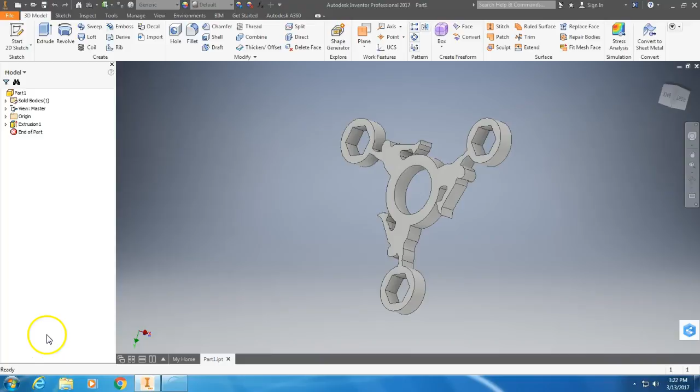So after we've designed our spinner, we're going to create an assembly and an output file that we're going to submit. First, we'll go to File, New, Part. We're going to make a new part, and this is going to be our bearing so that we can do our assembly. So take a circle, and that's going to be 0.866.

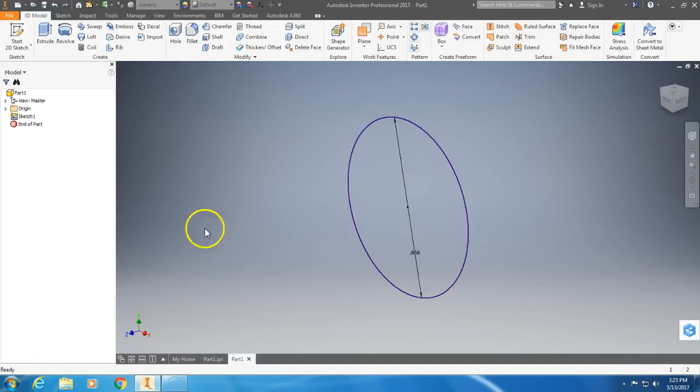Finish, and then we're going to need to extrude it. How big did I say the bearing was? 0.275. So we'll extrude 0.275. So that can be our bearing, and then go ahead and say File, Save As.

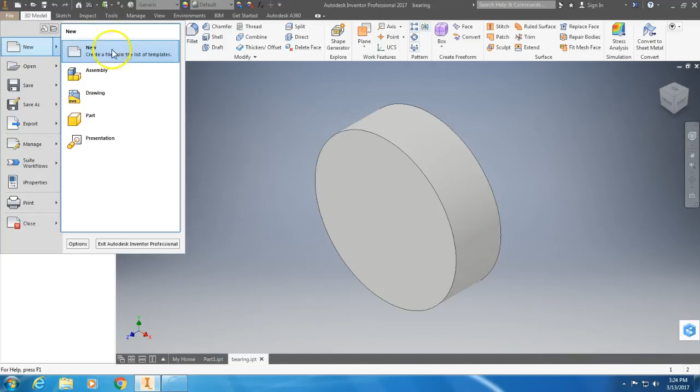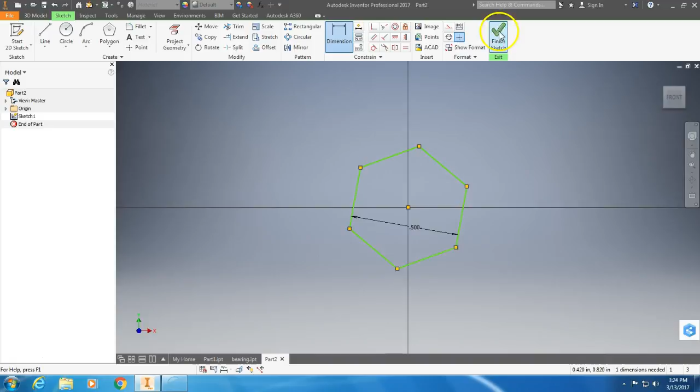Bearing. And then we're going to go to File, New, Part. Now we need our hex nut, so we're going to do a 2D sketch again. Take this down to polygon, six-sided, done. Dimension from there to there to be 0.5, finish, and then we're going to extrude that out 0.25. All right, so there's our hex nut, and we can save that.

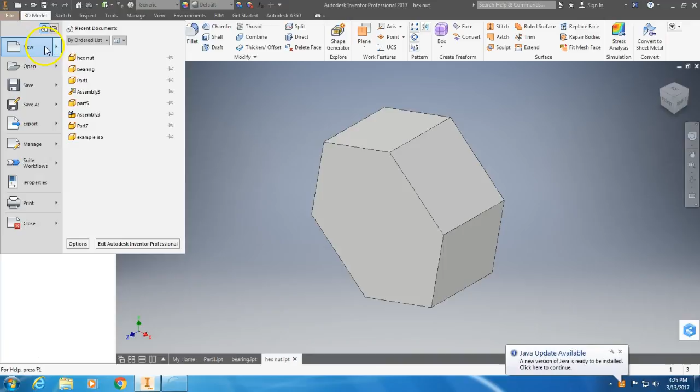Save as hex nut. All right, so now let's go into a new assembly.

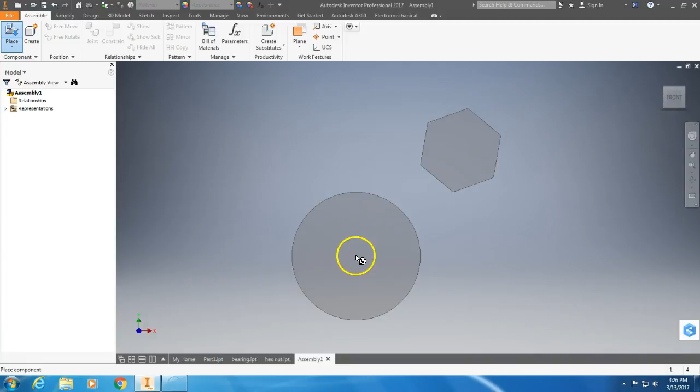And then we're going to place, find our parts. So I saved those in H drive, Fidget, open, cancel. All right, so I'm going to need 3 of these.

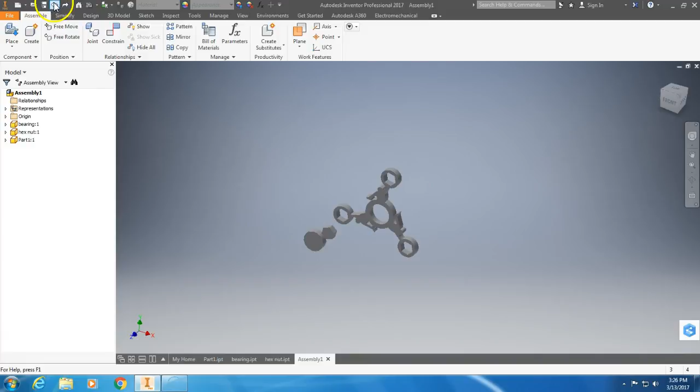So what I'll do is copy, paste. That wasn't what was supposed to happen. Let's go back and try that again. Copy, paste, there we go, and then paste one more time.

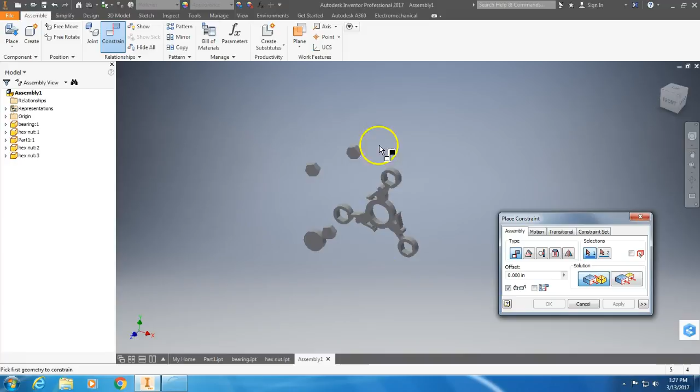All right, so now we're going to need to assemble this. So I'm going to put these guys in there and my bearing in there to make sure my holes are the right size and run my interference check. I'm going to pause while I do that, since you guys probably don't need to see me do that again.

Okay, I went ahead and colored things different colors so you can kind of see where things are. And then it occurred to me that you may not have done an insert constraint before, so I'm going to show you how to do that.

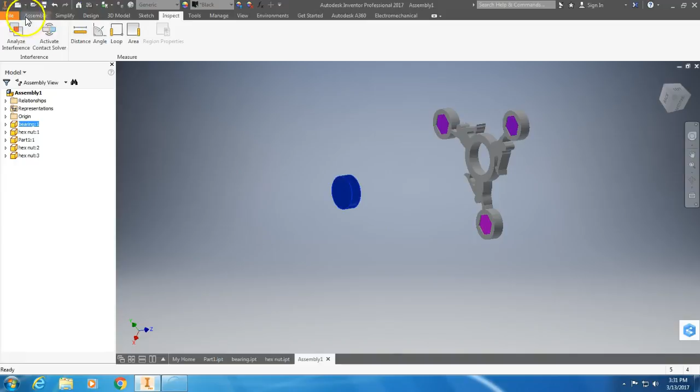So in your assembly constraint tools, if you click on insert, you can find the middle of this and the middle of that, and then you can pop those together. So that's how you do an insert. Okay, so now I've got this together.

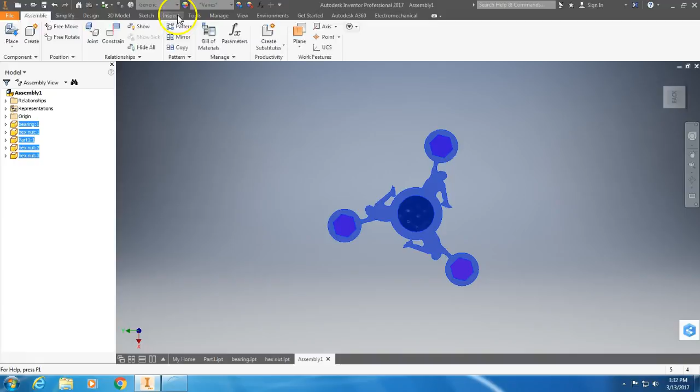We're going to highlight it, and we're going to go to inspect, analyze interference, make sure there's no interference, and then this is where we're going to make any changes that you want to make to your design.

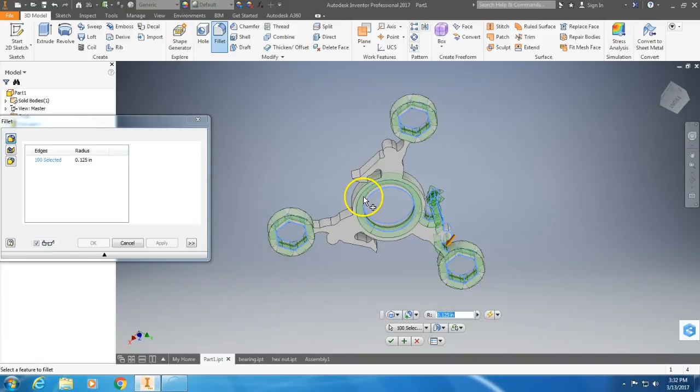So if we go over here to our basic design, we can kind of round the edges a little bit. So if we go to feature, we should be able to - not that feature, let's try that again.

Let's try doing a loop. That's what we want. All right, so what we're going to need is something very small, so 0.01. See what that looks like. That looks like it's going to work. Let's try 0.02. Still going to work. 0.03. I think I like 0.02.

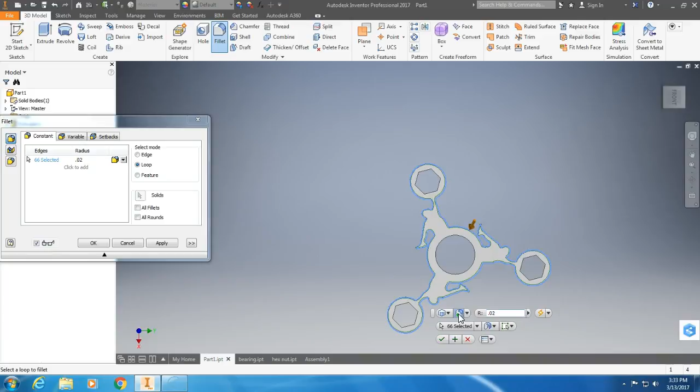Okay, take a look at what that looks like. So now we have nice rounded edges there. So flip it over here, do the same thing. So we're going to click loop.

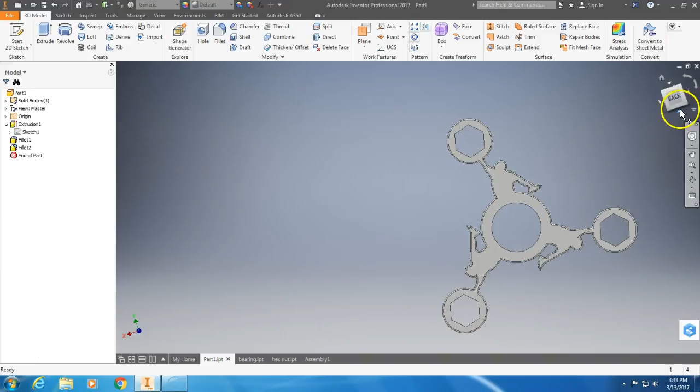0.02. Check that out. You want to be careful if you do the inside because that's where your bearing goes, and if you cut too much off, you're not going to have much grip anymore to hold your bearing in place. So that's basically it.

We want to make sure that our fidget spinner stays relatively small. So let's take a look at how big mine is here, because it needs to fit between your thumb and pointer finger and the inside of your hand there.

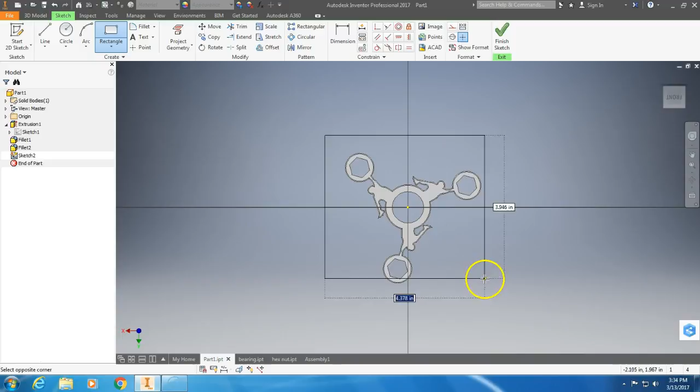So we're looking at, like, we want to stay probably about 4 inches by 4 inches max. We can't get too big with these, or else it's going to be really hard to spin them. But there you go. That's our custom spinner.

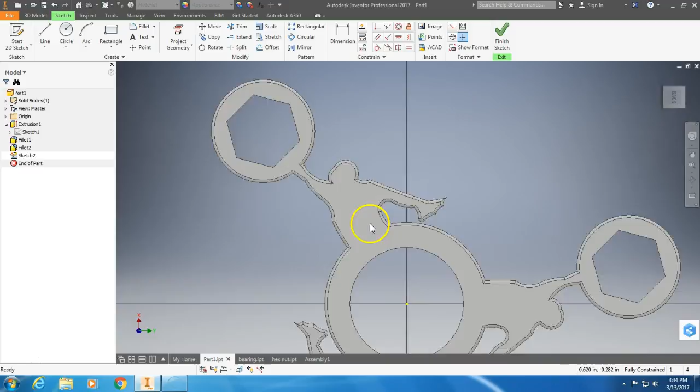So our requirements here are that you create a custom fidget spinner that you've designed based on either a logo or a design, and it's evenly balanced. And then you've got an assembly that shows that everything's going to fit together. And then I promised you the last thing you want to do is get it ready to print.

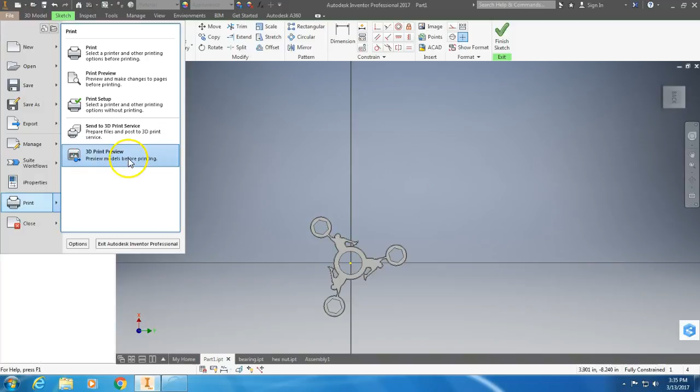So we're going to go back to our main part file, and we're going to go up here and down to print, send to 3D print service. Oh, because we're in drawing mode. Let's try that again. File, print, send to 3D print service, and we're going to make sure that we are in inches. That all looks good.

And then we're going to click OK, and it's going to ask us where you want to save it. You can save it to the same file. It's going to be an STL file, though. That's the file that I need to be able to print. And then this is going to open. Don't worry about that, just close that down.

And then if I go to my H drive, to Fidget, this is the one that I want to upload to Schoology. Is this one right here that says, well, has this little paper with a certificate next to it. Okay, it says certificate trust list. That's the file I need to print off your spinner.

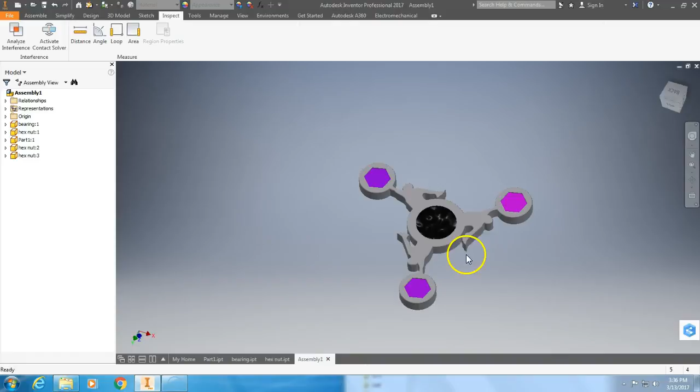But I also would like you to go to your assembly and do your analyze interference and take a nice screenshot with the snipping tool of that. So submit that as well so that I know that everything fits, so that when we print it, I'm not going to be wasting my time and material. So that's how you're going to do your assembly and submit that for 3D printing.